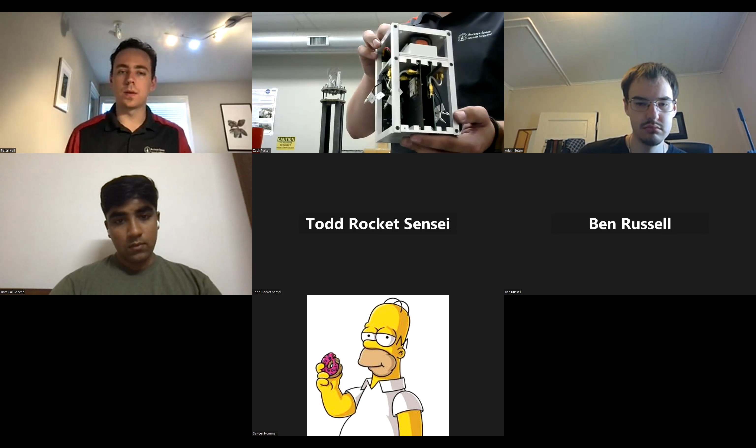They're not mounted in here right now. We had to redesign some of the mounting hardware after some difficulties came up, but they'll just be mounted in those 2 slots on the left and right, bolted in there and secured properly. The connections leading off from those feed into those bulkhead connectors in the middle there. Zach, can you rotate that 90 degrees? Yep. So there is a locking connector there that's fixed into the aluminum bulkhead. So the flight computers plug into those.

And then from there, we have our recovery harness going up to our recovery bulkhead. The reason for that is just to make sure that any load or stress that may be on that harness, either during flight or during recovery, is not distributed to the boards and is just distributed onto the much more secure aluminum frame.

Okay. In terms of arming, we're going to be arming with screw switches. Those are mounted actually on the integrated systems bay with wires leading down to there. So once you're on the pad, there are holes drilled within the side of the rocket, so we can externally access these, reach in there, screw that, arm it, and then we'll listen for the arming signals, the beep codes from the flight computers, to make sure everything is ready to go before we launch.

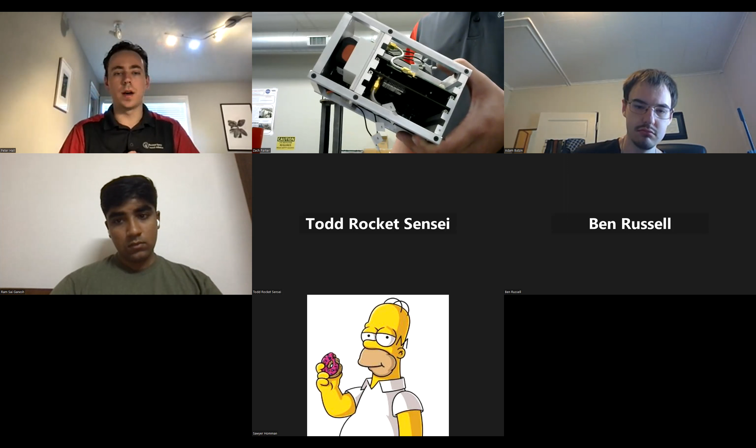Okay. All right. Can you show me where the batteries are? So the batteries for the flight computers will be mounted. Those are not present in here at the moment. I can forward over drawings later if that'll be helpful, but essentially they are adhered. So we have two PCBs in the middle here. There will be two more on the outside, one for each flight computer. The batteries are going to be adhered to those with either command strips or epoxy, and then there's a 3D printed housing going over them as well. So we have both mechanical and adhesive methods of securing them.

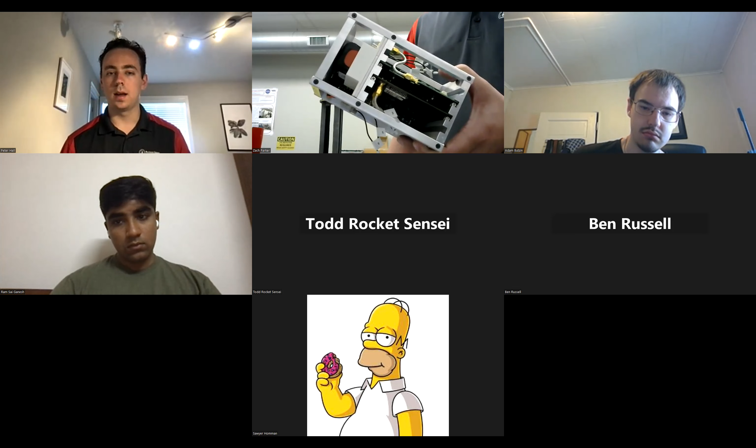Okay. I'm having a hard time visualizing where the batteries are on that cube. Where would they physically be mounted, and how? Okay. So are you able to see the two printed circuit boards in the middle there? Yep. Zach, can you point those out? Yeah, one there and one there. So each flight computer will have a dedicated board. These just haven't arrived yet, unfortunately.

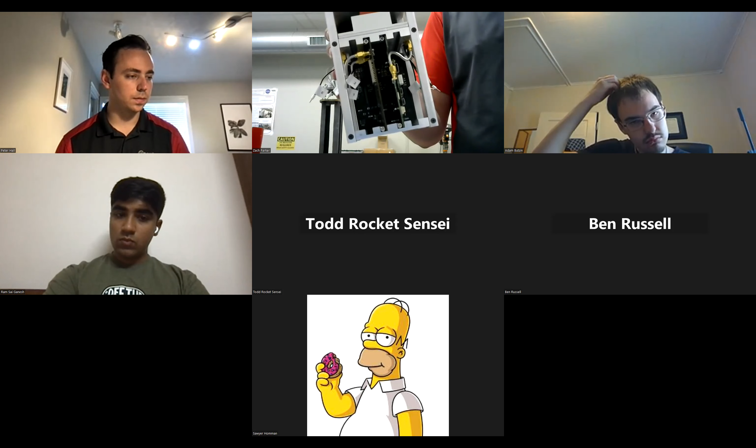And that board basically stores the flight computer and the battery. The flight computer is screwed on there with short standoffs, and then the battery will be essentially glued onto there, either with epoxy or command strips, and then there'll be a 3D printed case that sits over top of the battery and screws into that board as well, securing it on. Okay, so in summary, the battery is mounted on the same board as the flight computer that goes into one of those two slots and locked in place, and there's a 3D printed cover over the battery to secure it in place so it won't go anywhere. Correct. So even if the adhesion failed, it would still be contained within there.

Okay, what's the delivery date for the boards, as you mentioned you hadn't got them yet? Sometime this coming week. Okay, so in plenty of time for the contest. Yeah, there should be no problem having those before the competition. Okay, all right.

Would you like me to talk? I like that design. I like the ability to pull cards out and replace cards. It reminds me of good old fashioned computers. Yeah, that was sort of the inspiration, to make it as adaptable as possible.

Okay. All right. And now we'll move on. Let me ask one question. You showed me only one switch. I assume there's a switch per component, right? Correct. Yes, the flight computers are entirely electrically isolated. So each one has its own battery, switch, and then dedicated cable harness for recovery. Got it. Okay, cool.

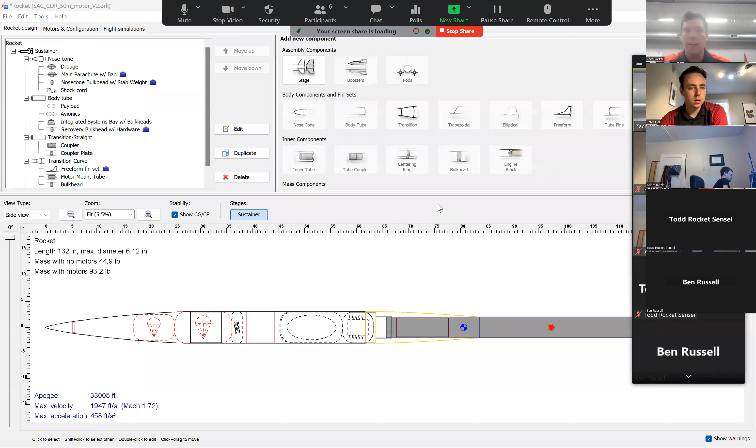So I would like to now see your OpenRocket with the modified motor and look at thrust to weight, velocity off the rail. All righty, one second here. Sure. Confirm that I have the correct OpenRocket file here. I will share my screen. All right, can you see our OpenRocket? I can see. There we go. Wonderful.

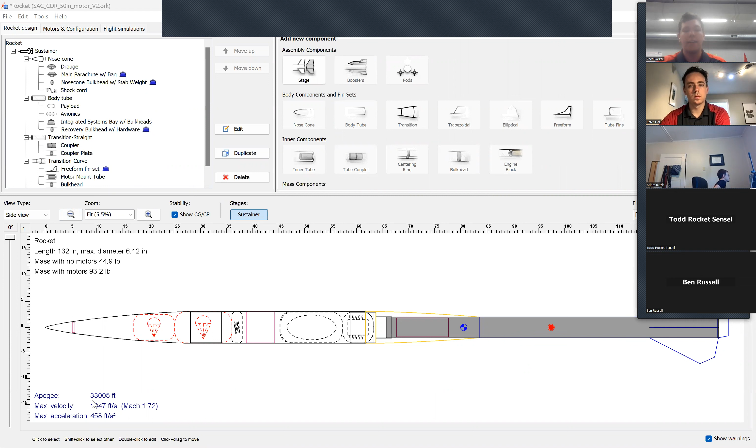All right. So this is our OpenRocket setup with the minor modifications to our motor and with the new motor that we're using. This is simulated with the direct test data from our static fire, which is giving an altitude of 33,000 feet. Okay. Can you go to the simulation for me, the actual simulation tab? Sure. Velocity off the rail is 38 feet per second. I think I may have a...

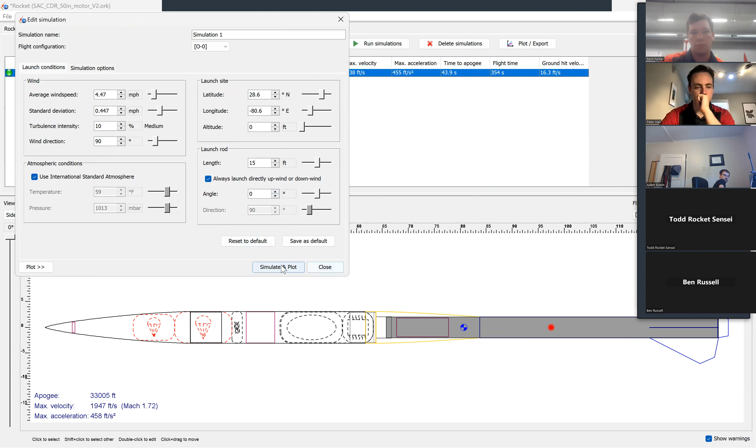One second here. Do an edit on the sim. Yeah, I've got it incorrect. That'll do it. Do me a favor and change it to 15 feet. 15 feet, yep. Aren't the Spaceport rails 17 feet? Well, but you don't have the full 17 feet. Yeah, fair enough. Okay.

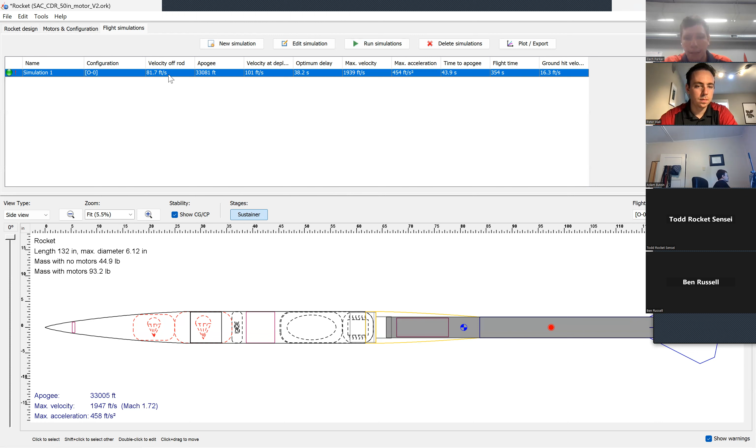Where are your rail buttons located? We don't have them modeled here. Can you see my cursor? We've got one rail button mounted into the hardpoint coupler right here, and then we'll have another rail button that is essentially welded to our fin can. Welded? Oh, okay. So we'll have a weld nut mounted on the fin can, and then a 3D printed aerodynamic shroud going over that, and it'll just screw right in. Okay, stability is about 2 3/4. That's okay. Go back to edit your flight sim again for me. Yes.

All right, so, okay. I would suggest going ahead and, we're not gonna do it today, but you might want to tweak your launch site for the actual spaceport. Okay. Yeah, I think it may have just gotten defaulted. We have run them with the actual launch site coordinates and things like that, but yeah, we'll definitely be sure to run back through them again.

Okay, what kind of average wind are you using? I think I just used the default here. It was something similar to this, what you can see. Okay, yeah, you may want to look at 15 miles an hour. And temperature is usually around 100 degrees, between 90 and 100 degrees. So you may want to adjust your standard atmosphere. All right. That's tweaking. That's absolutely tweaking.

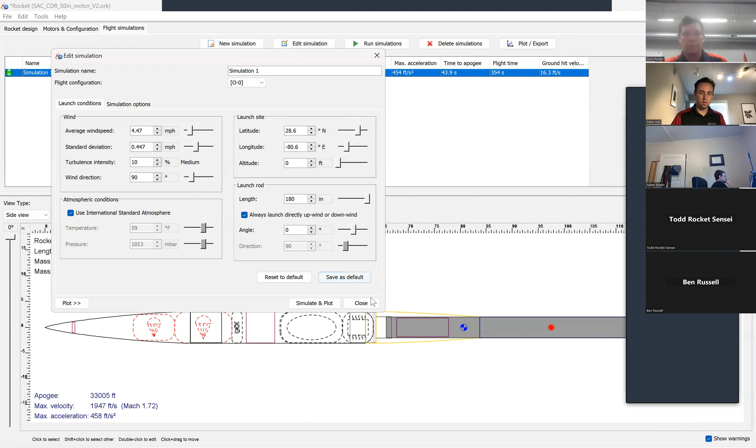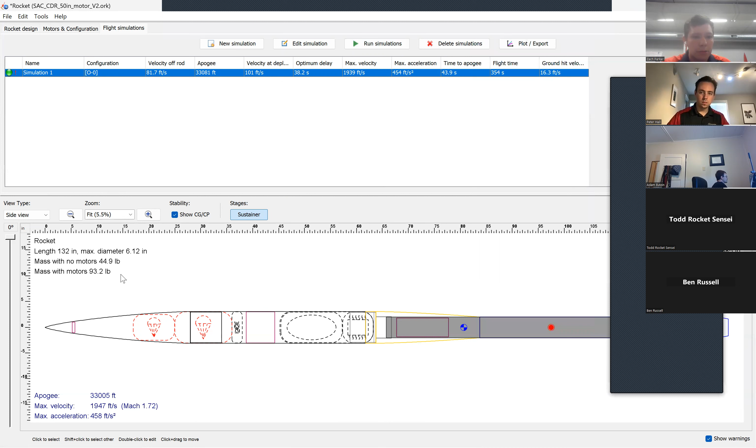Yeah. 33,000, that's not bad. Your fins will definitely hold up to that sort of Mach. Looks like your joint will. Thrust to weight. What is the thrust to weight? I think it was about 7 from the report. Okay. Mass, all right, motor is 93.2. Okay.

I think that does it for me. I think you guys are in good shape. You're definitely going to have to do some explaining, especially on the recovery side. I would expect lots of questions on that, just because it's unique and it's relatively complex. Yeah, we're definitely used to that.

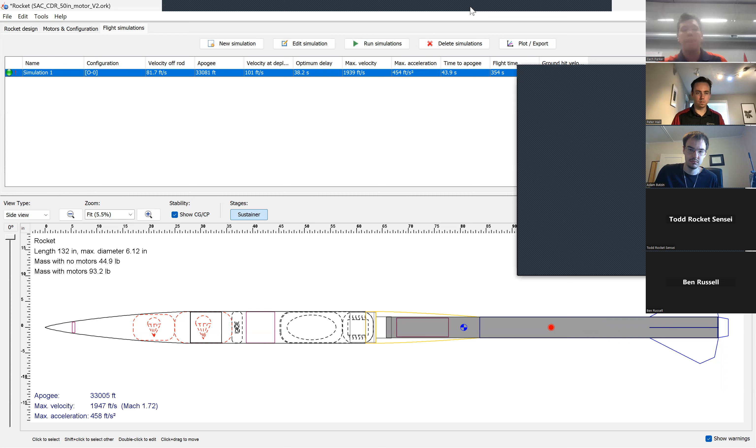Unfortunately, I didn't have my recovery lead. I think he's at work right now. So he could talk through it all a little better than me. So we'll be sure to get a better handle on that. Yeah, that's fine. For the initial flight review here, I think we're doing good.

I can't think of anything else other than just to remind you that based on that static test, that's the motor that you need to bring to the contest. All right. Will do. So since you've been there before, you understand the environment and all that sort of stuff. I think we're bringing about 20 people who went last year. Okay. And you know the rules about going out to the pad. You have to be Tripoli members and all that sort of stuff.

And obviously registration is bright and early, and we're expecting somewhere around 130 teams with an average of about 10 members per team. So you can do the math, and everybody has to get registered. Yep. I think we may have one of the biggest teams this year. I know we were close last year. I think we're bringing 40 this year. Yeah, exactly. So let me turn the tables. Anybody on the team, do you have any questions for me?

Peter, did you want to mention the TeleMetrum on the nose cone and all that stuff? Yeah, so there's one thing we should maybe discuss quickly. I don't know if we mentioned this in the review so far, but the nose cone and the body tube land separately. This disconnection occurs at about 1,500 feet, so they should land pretty close together.